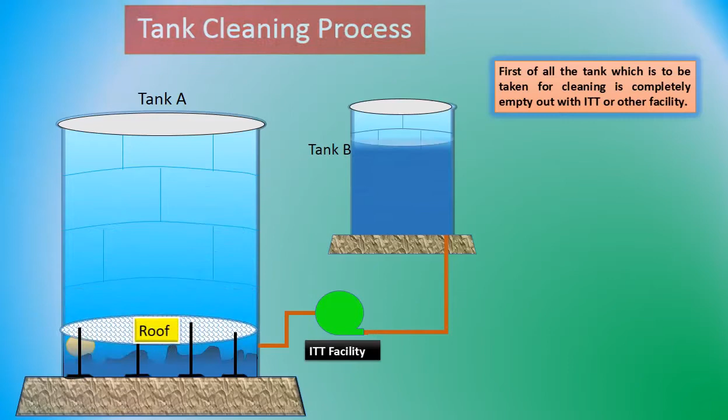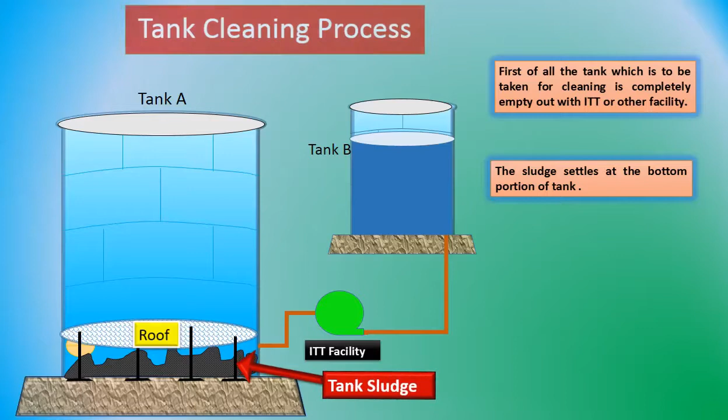Now we start with the tank cleaning process. First of all, the tank which is to be cleaned is to be completely emptied out with ITT or other facilities like ERV. In this process, the sludge will be settled at the bottom portion of the tank. Once the product transfer is completed, lineups of ITT facilities and other tanks will be completely isolated.

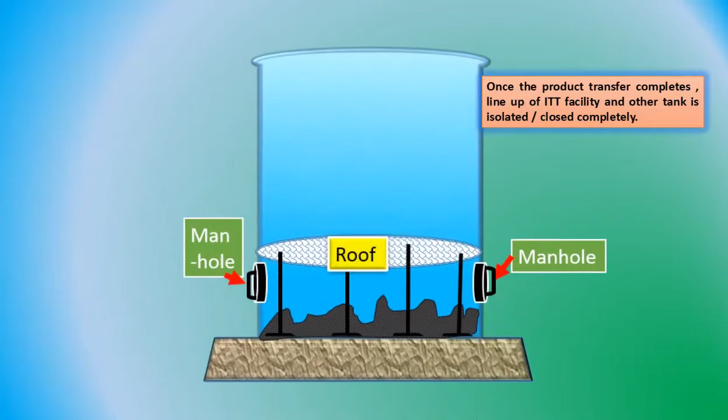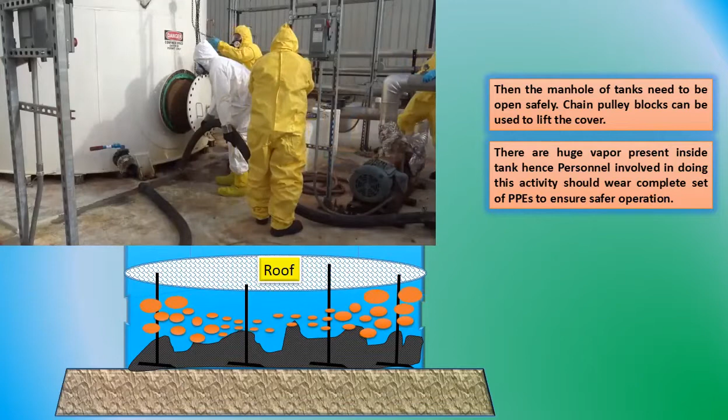Now the manhole of the tank will be opened. We can use chain pulley blocks to pull out the cover of the manhole safely. There is huge vapor present inside the tank, so personnel who are involved in this activity should wear a complete set of PPEs to ensure safe operations.

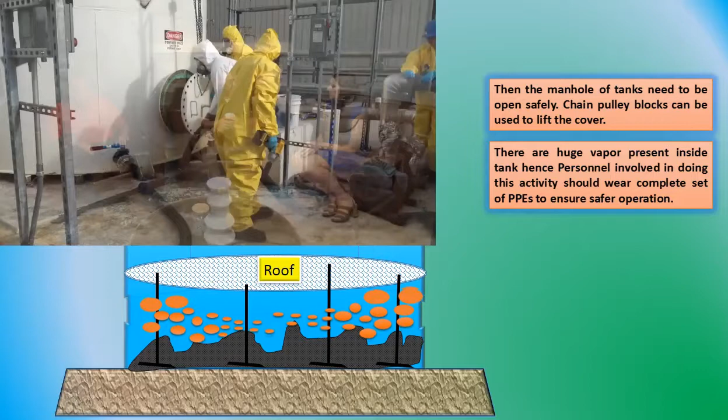After removing the manhole cover, we have to remove all the vapor which is present inside the tank. To make it faster, we place one flame-proof exhaust fan at one side of the manhole and the other side of the manhole will remain open. This is how the degasification inside the tank is done. Sufficient time is required for the degasification process to complete. Generally, it takes 24 hours to 48 hours. It depends on the type of product which was stored in the tank.

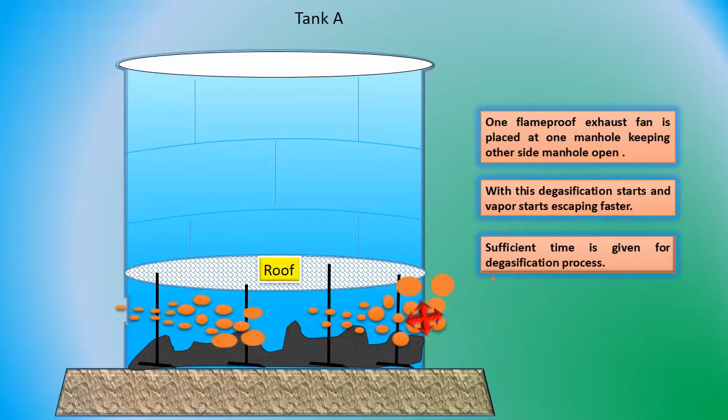Once the degasification process is completed, we ensure that no vapor is present through an LEL meter. After this, we place a slurry pump and empty barrels near the tank. With the slurry pump, heavy sludge which is accumulated at the bottom of the tank is collected in empty barrels. It is required that during this activity, the exhaust fan is running throughout.

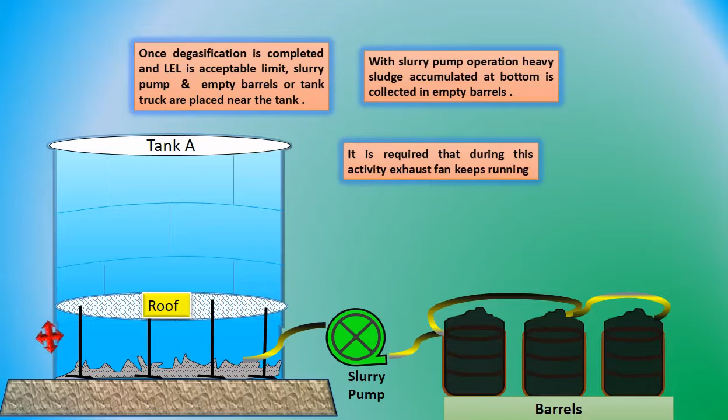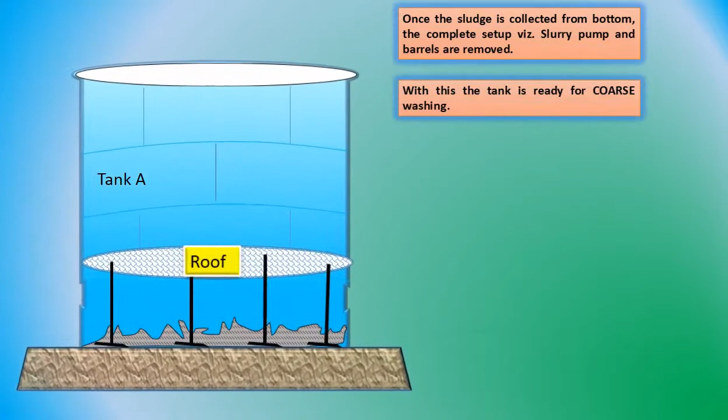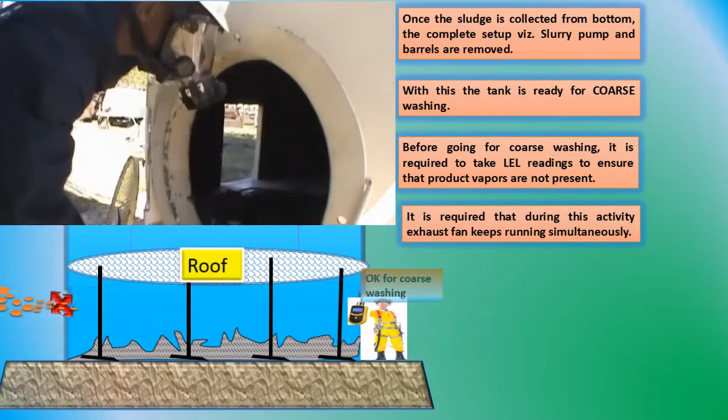Once the heavy sludge is collected in the barrels, we remove the slurry pump assembly. With this, we can say the tank is ready for coarse washing. But before going for coarse washing, it is required to take an LEL reading once more to ensure that there is no vapor present inside the tank. It is to be ensured that the exhaust fan is running during this activity also.

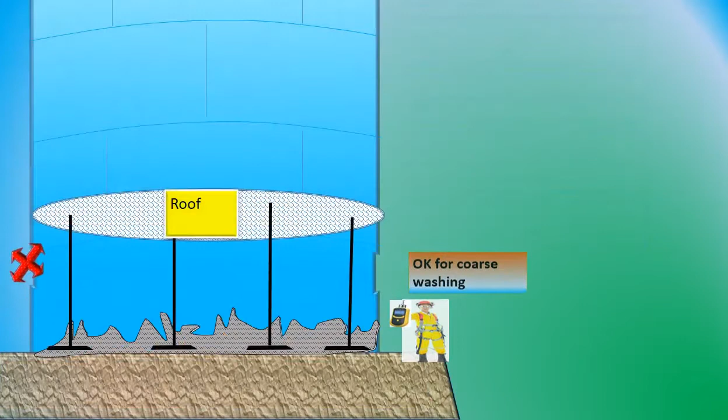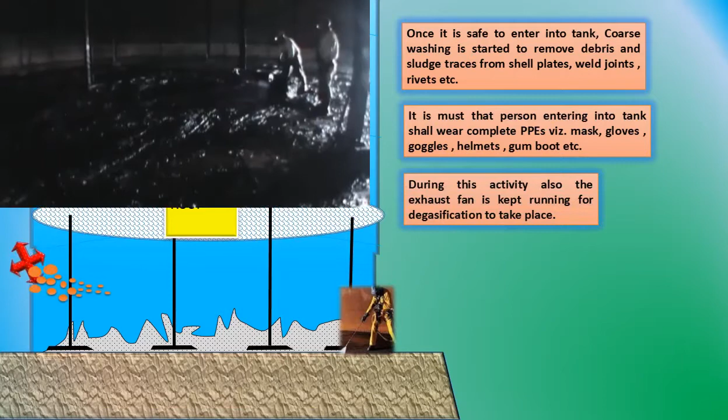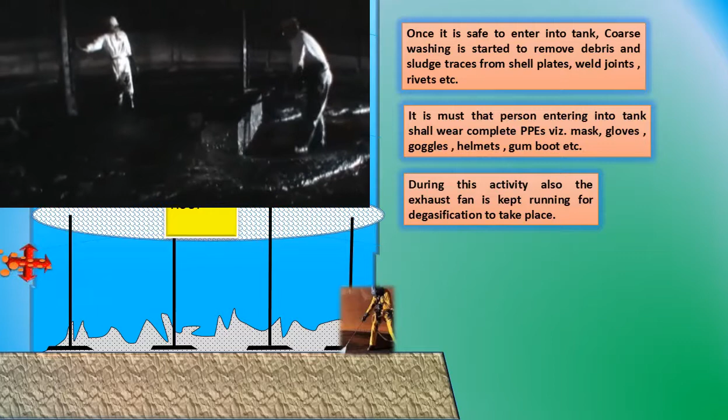Once it is ensured that there are no vapors present in the tank and it is safe to enter into the tank, the coarse washing can be started. The coarse washing is basically done for removing the debris and sludge traces from the shell plates, weld joints, rivets, etc. It is a must that the person who is entering into the tank shall wear a complete set of PPEs as discussed earlier. During this activity also, the exhaust fan should run continuously.

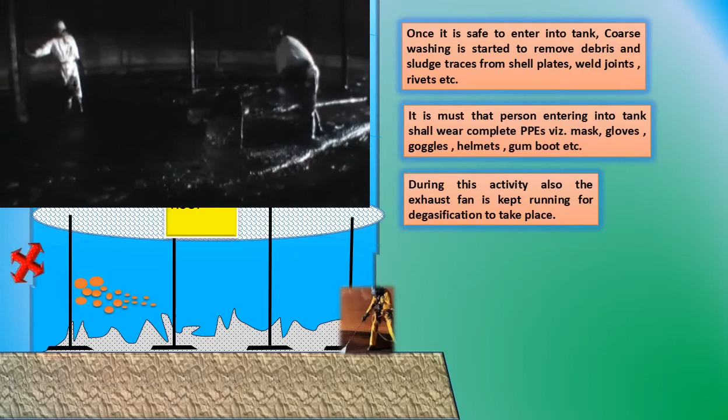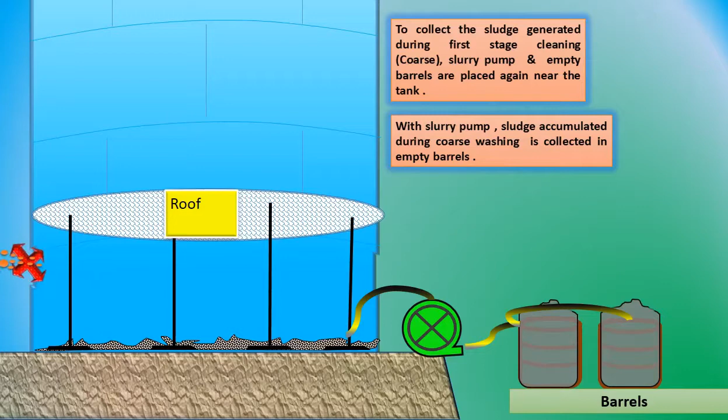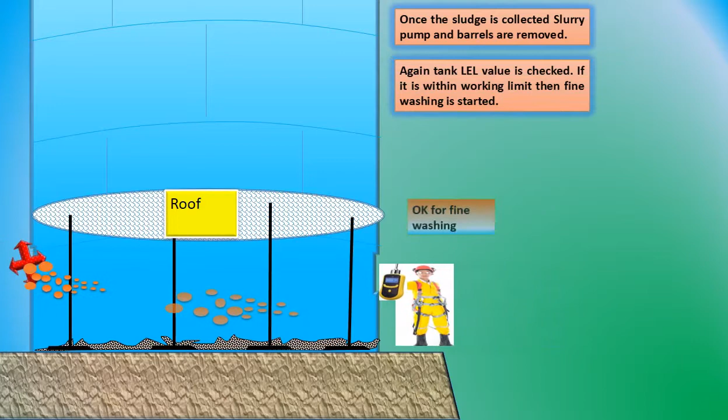Once the coarse washing is completed, slurry pump and empty barrels are placed again near the tank. With the slurry pumps, the sludge which is accumulated during the coarse washing can be collected into the empty barrels. Once the sludge which was generated during the coarse cleaning is collected, we remove the slurry pump and barrels and we again check for any vapor presence in the tank through the LEL meter.

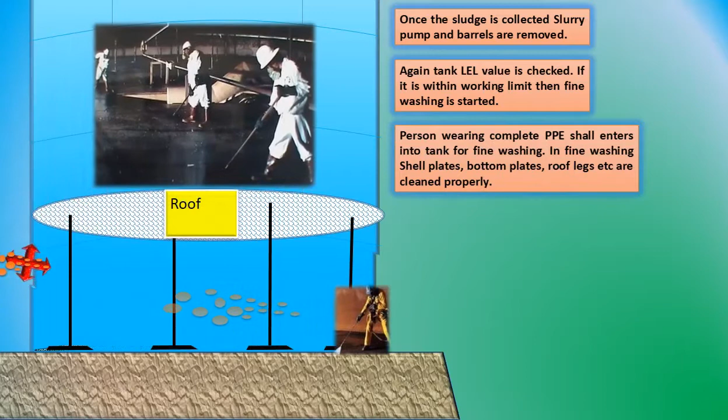If no vapor is present in the tank, the fine washing can be started. In fine washing, the shell plates, bottom plates, roof legs, etc. are cleaned properly. A person wearing a complete set of PPEs shall enter into the tank for fine washing. The clip shows how the fine washing is being done.

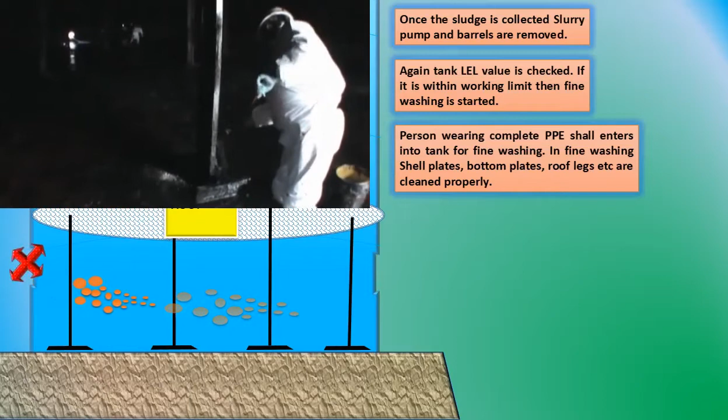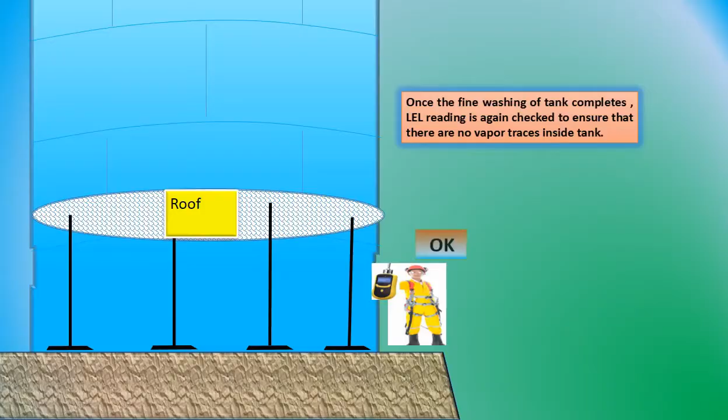Once the fine washing of the tank is completed, we again verify that no vapor traces are inside the tank through the LEL meter. If no vapor is present inside, the tank can be handed over to the concerned for internal inspection. The clip shows the internal visuals of a clean tank.

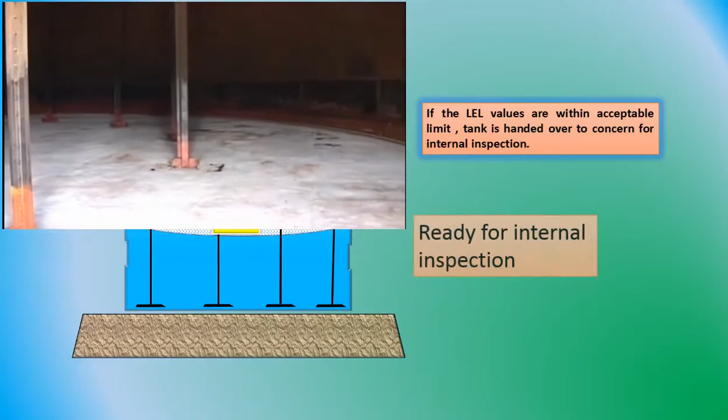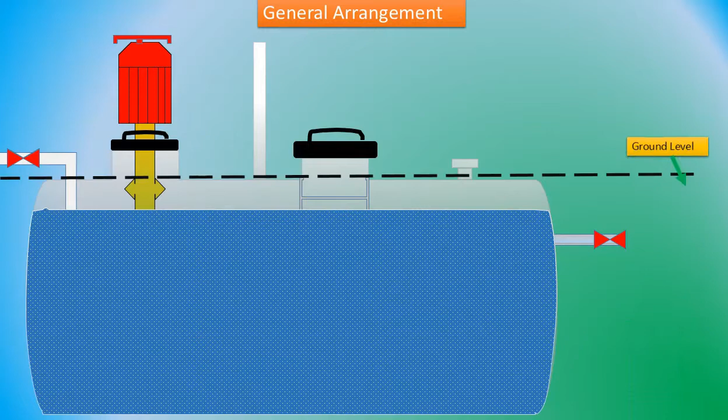Now we will see the cleaning process of underground tanks. Before going to the cleaning procedure, let us have a look at the general arrangement of the tank. These tanks are placed below the ground level. It has a vertical pump assembly, an inlet and outlet pipe section, a manhole, a vent pipe and a gauge well for sampling and level measuring.

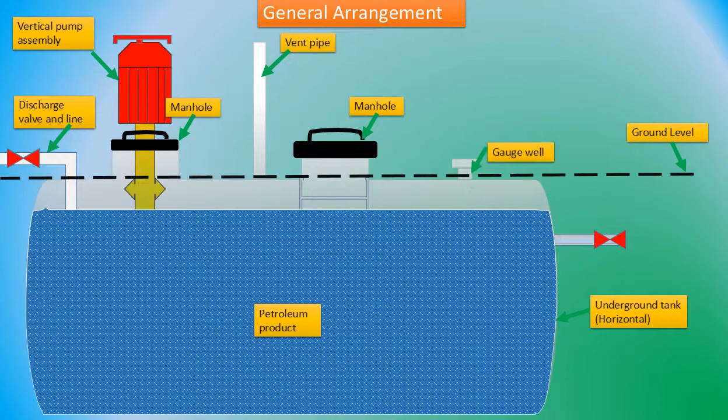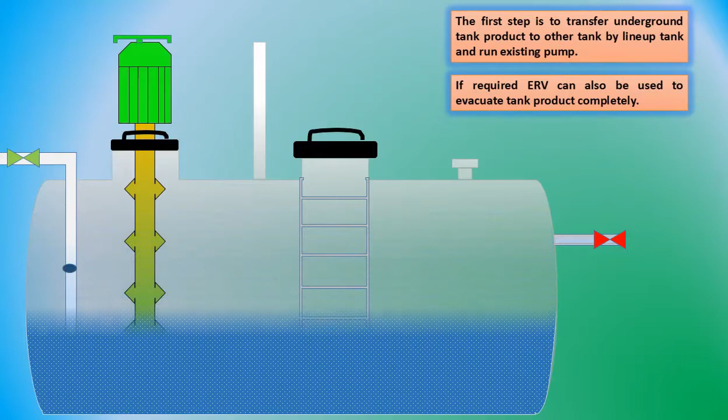The first step is to evacuate the tank product into some other tank with the help of the existing sump pump. If required, we can also use an emergency response vehicle for evacuating the tank product completely. Once the evacuation is completed, the sludge settles at the bottom of the tank and shell plates.

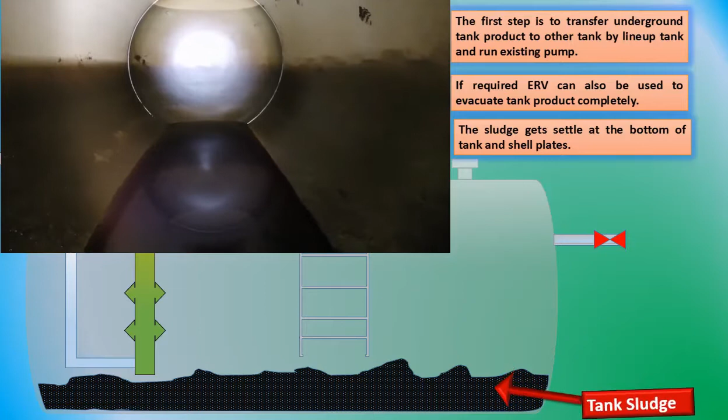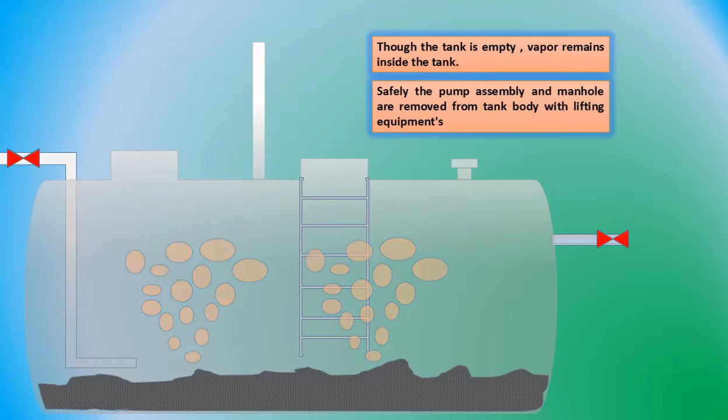Though the tank product is completely evacuated, vapor will remain inside the tank. Hence, with all safety precautions, the pump assembly, manhole, and other fittings on the tank are to be removed. Once the vertical pump assembly, manhole cover and other fittings are removed, a flame-proof exhaust fan is placed at one side of the manhole, keeping the other side of the manhole open. This is how the degasification of the tank is done.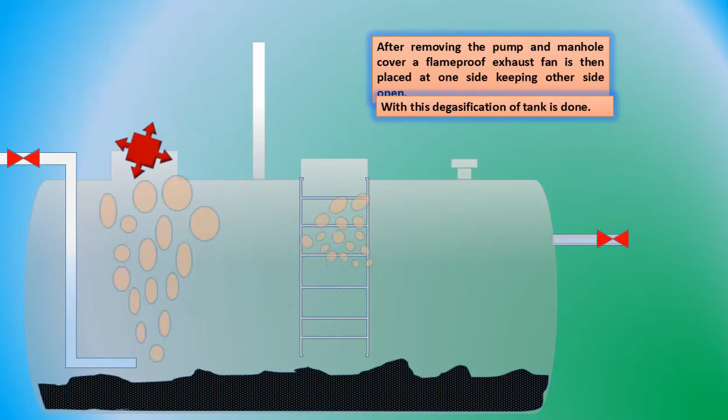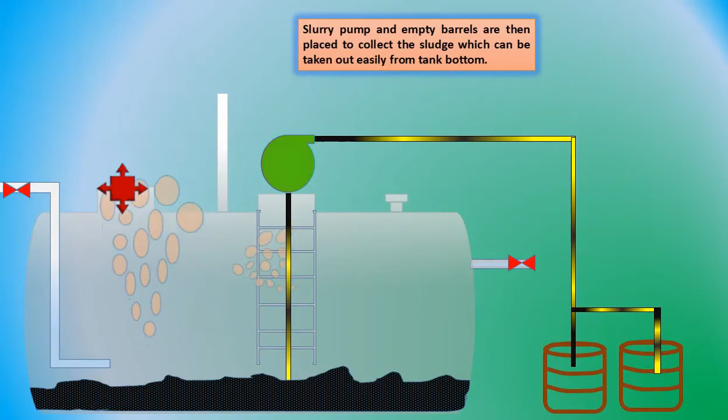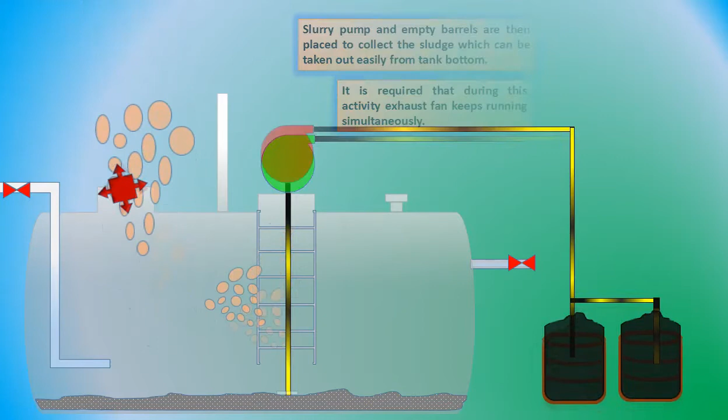Once the degasification of the tank is done, we arrange for a slurry pump and a few empty barrels to collect the sludge, which can be easily taken out from the tank bottom. This is to be ensured that the exhaust fan is running throughout the process. Once the heavy sludge is collected from the tank bottom, we remove the slurry pump and barrels. Now the tank is ready for coarse washing. But before going for coarse washing, we have to ensure that no product vapor is present inside the tank through the LEL meter.

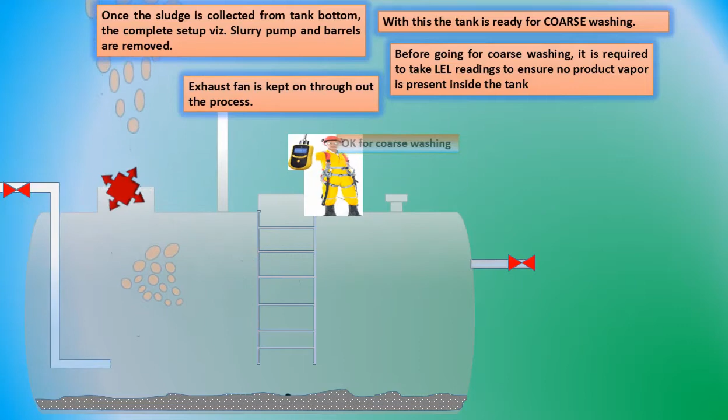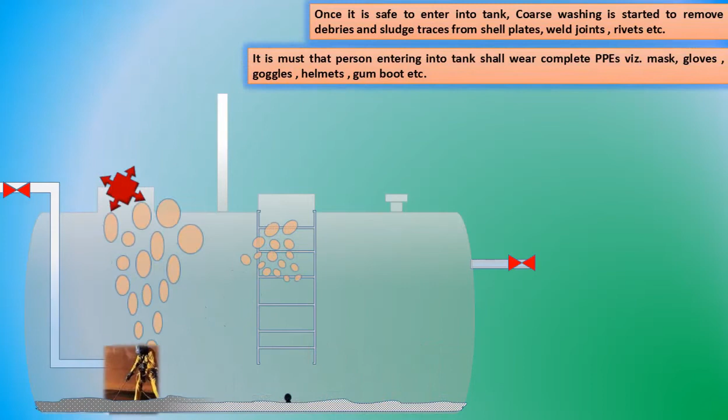Once it is ensured that no vapor is present inside the tank, a person wearing a complete set of PPEs can enter into the tank to carry out the coarse cleaning. Once it is done, we arrange for a slurry pump and empty barrels to collect the sludge which is accumulated during the coarse cleaning. During the process, the exhaust fan should keep on running.

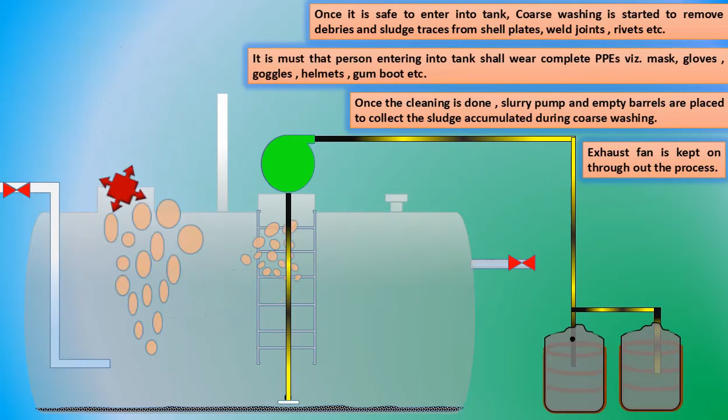Once the sludge which was accumulated during coarse cleaning is collected, we remove the slurry pumps and barrels. We again check for any vapor presence through the LEL meter. In case no product vapor is present, the fine washing can be started. To carry out fine washing, a person wearing a complete set of PPEs enters into the tank. Then the shell plates and other parts of the tank are cleaned properly to make the tank free from sludge traces.

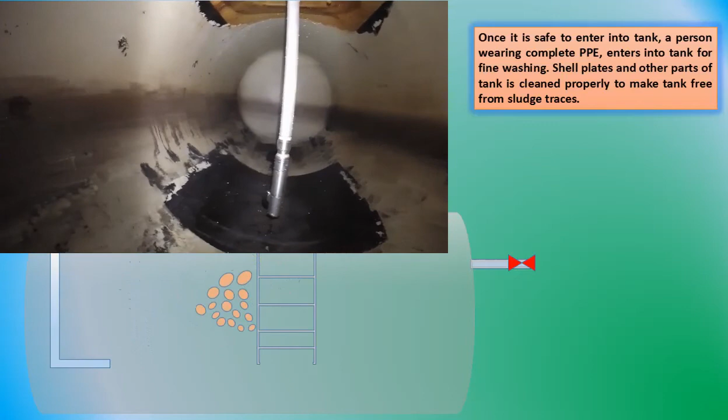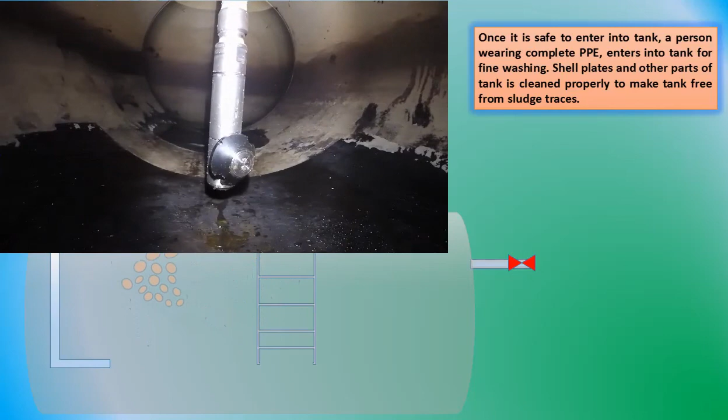Once the fine washing of the tank is completed, we again check for any vapor presence and hand over the tank to the concerned for internal inspection.